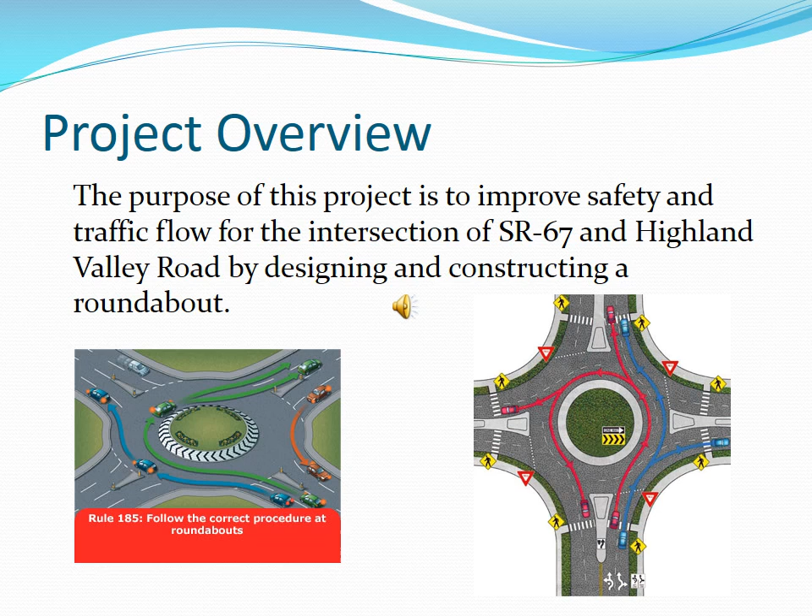The ASC Engineering team consists of, from left to right, Christopher Ramos, acting as the environmental engineer, Dwight Ashman, acting as the geotechnical engineer, Richard Moreno, acting as a traffic engineer, Joe Berhumi, acting as a transportation engineer, Jason Bell, hydraulics and hydrology, Sean Mosh, cost analysis.

The State Route 67 and Highland Valley Road intersection is located approximately 20 miles northeast of San Diego. This intersection serves as the main arterial passage which connects the unincorporated communities of Ramona and Julian to the greater San Diego area. Every day, over 2,500 vehicles arrive at this intersection during the peak traffic hour, creating traffic that extends for miles on each connecting corridor.

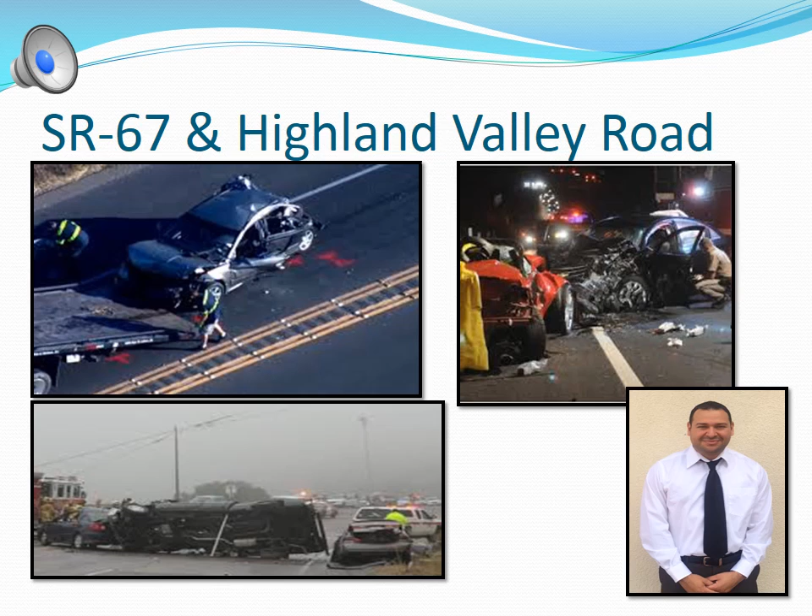The source of this delay stems from the intersection's inadequate number of lanes, the volume of traffic, and the traffic signal located at the intersection itself. During low traffic hours, speeding drivers often misjudge the stopping distance required for their vehicles to come to a complete stop. This mistake leads to catastrophic vehicular accidents.

These traffic delays have a significant impact on the environment by means of CO2 emissions, the driving mood of motorists by provoking aggressive driving, the economy of the city, and the everyday life of the Ramona community. In order to address these problems, ASC Engineering has developed and designed a roundabout intersection solution. This design will help to reduce the number and severity of accidents, reduce roadway delays, reduce CO2 emissions, and promote economic and community growth.

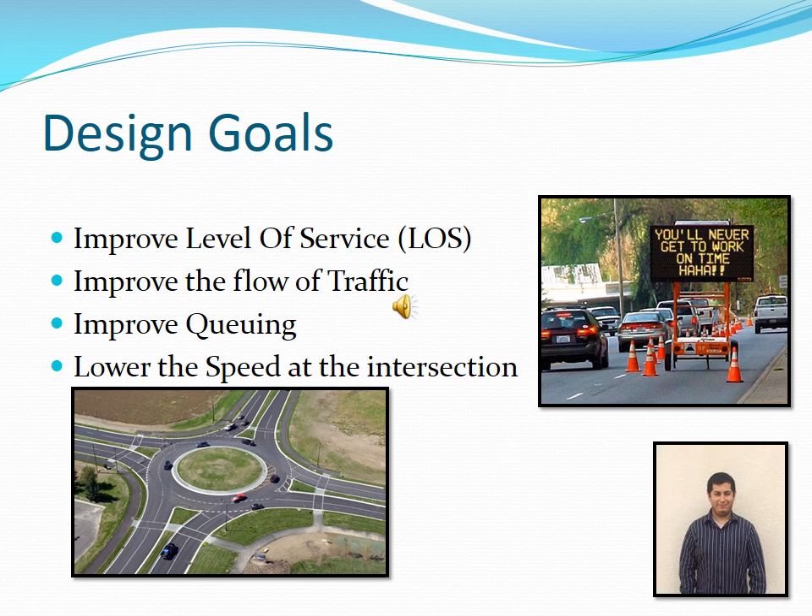Our design goals here at ASC Engineering for our roundabout are to ease the flow of traffic, as well as improve the level of service at the intersection of State Route 67 and Highland Valley Road. Our roundabout will improve the queuing, as well as lower the incoming speed at the intersection. We at ASC Engineering chose to adhere to the highway design and highway capacity standards. We based our design off of the NCHRP, National Cooperative Highway Research Program.

We designed a multi-lane roundabout that consisted of 2 lanes. These lanes are 16 feet wide so that a 67-foot truck can travel through the roundabout safely. The proposed roundabout will have a diameter of 160 feet. The roundabout is designed for a speed of 25 miles per hour.

This design will lower the current speed of the State Route 67 highway from 55 miles per hour to 25 miles per hour. We calculated that this design would be able to improve our level of service from a grade F to a grade D. We calculated that our design will be able to continue to provide a better flow of traffic for the next 20 years.

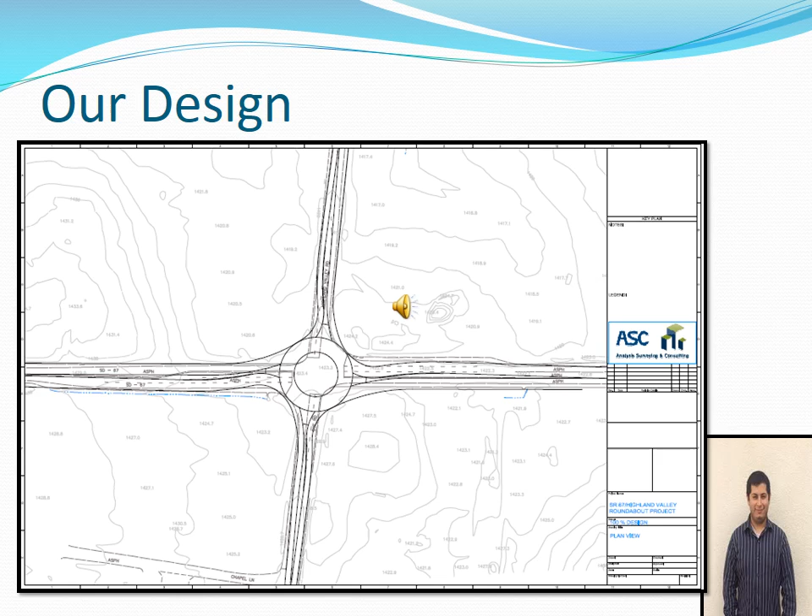Our approach at ASC Engineering will have a limited impact on the surrounding environment, as well as improve the flow of traffic at the intersection. We will also provide a safer speed and reduce the number of crashes at the intersection. We at ASC Engineering believe that our design meets all the criteria we set out to accomplish at the beginning of our proposal.

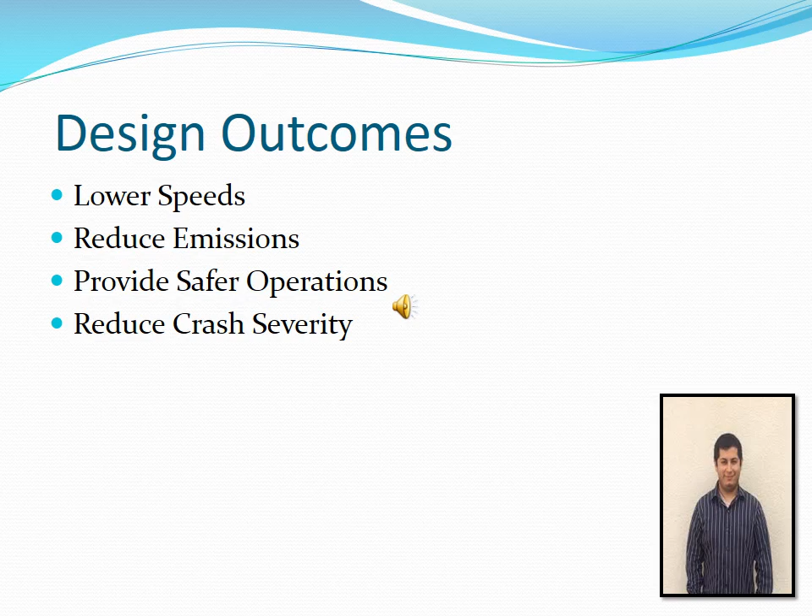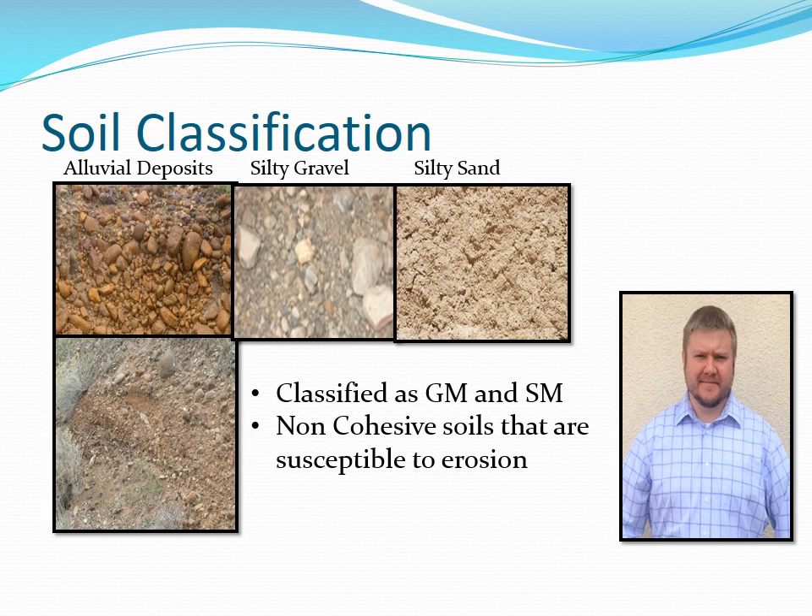The project site is primarily comprised of alluvial deposits containing well-rounded boulders, gravels, sands, and silts. The unified soil classification for these deposits is primarily silty gravel and silty sand. These are both non-cohesive soils and as such are highly susceptible to erosion, making stormwater management important for the success of this project.

The R value for this project was obtained from recent examination of the site, with an R value range of 20 to 45, which is typical of gravels and sands. An R value of 20 was taken as recommended from the California Highway Design Manual based on the lowest R value present.

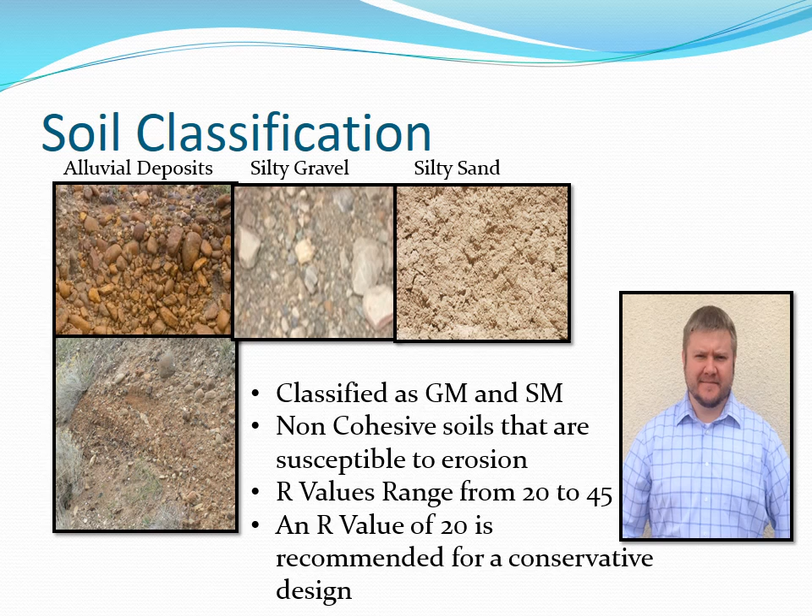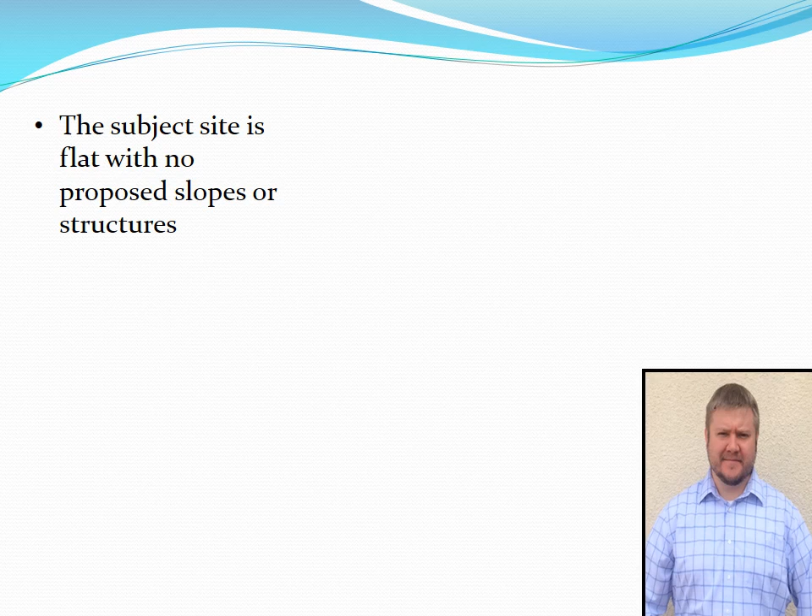The subject site is flat with no proposed slopes or structures, and minimal grading will be required. The soil at the site is adequate in both strength and expansion characteristics for the proposed roundabout. No conditions or structures were identified at the site that would cause any engineering challenges to the proposed project.

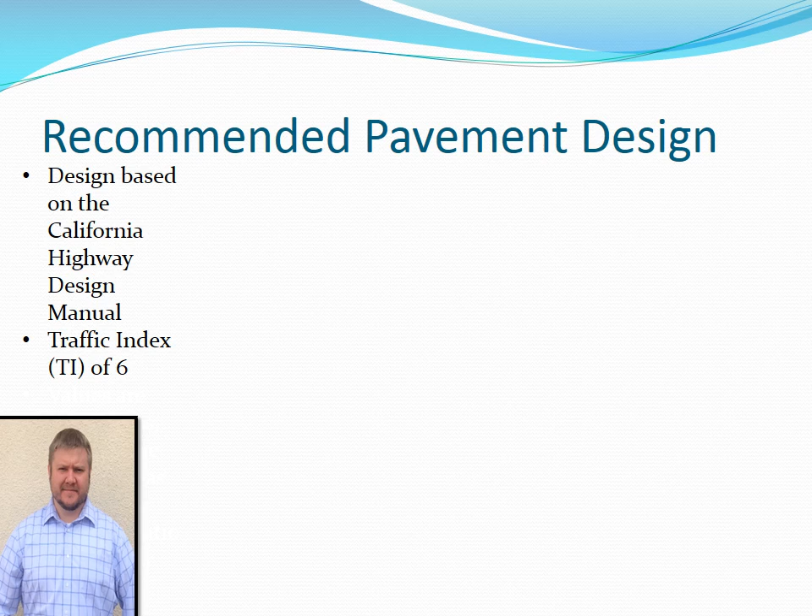Pavement design recommendations are based on the California Highway Design Manual, using a traffic index of 6 based on projected traffic characteristics. These values are minimums and may be increased as deemed necessary by the transportation engineer. The subgrade should consist of compacted native soil with the R value taken to be 20 for this project. Overlaying the subgrade is the number 2 subbase. This layer should be 4.5 inches thick with a compacted R value of 50.

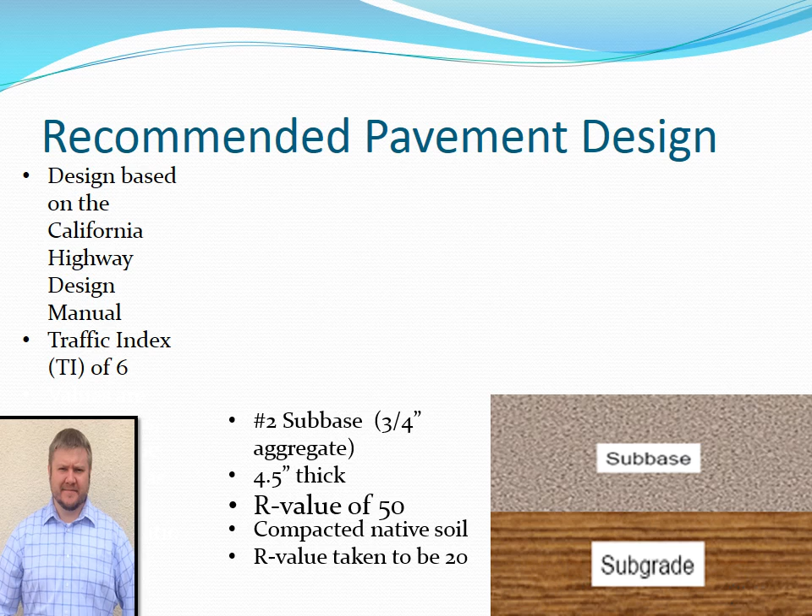The number 2 aggregate base should be a minimum thickness of 5.9 inches with a compacted R value of 78. The surface layer should consist of compacted asphalt concrete with a binder graded PG 64-10, and it should be at 3.2 inches minimum thickness. These values were obtained based on the manual method from the California Highway Design Manual and should be used or exceeded in all pavement design for this project.

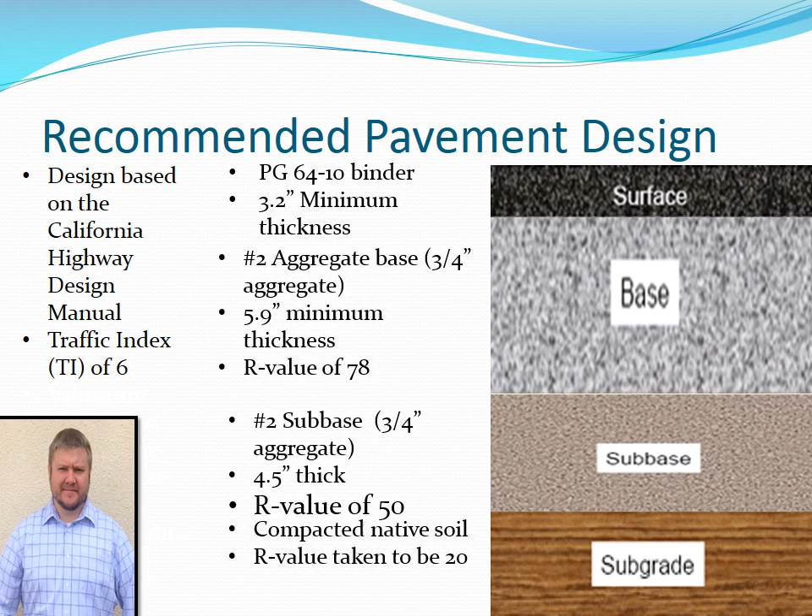For the hydrology, I broke up the areas into 4 quadrants: northeast, northwest, southeast, and southwest. The arrows indicate the rainfall flow pattern, as you can see on the site plan. The water naturally flows from the southwest quadrant to the northwest quadrant and then to the northeast quadrant. Also, the southeast quadrant flows to the northeast quadrant, where the water collectively drains off-site.

For the drainage analysis, I used the 100-year event to design the drainage system. 24-inch drainage pipes will be required to handle the peak runoff flow for this 100-year event. The circles on the site plan represent these drainage pipes.

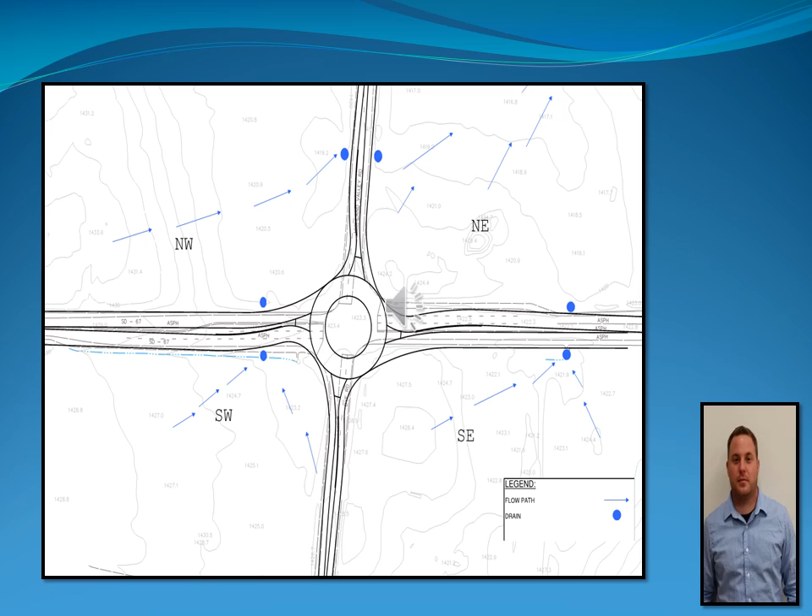According to the California Environmental Quality Act, which requires that local government agencies, prior to taking action on projects over which they have discretionary approval authority, consider the environmental consequences of such project. Some potential areas of concern that are associated with this project are air quality, greenhouse gases, noise, traffic, and water quality. Due to the current condition of the site, it is not suitable habitat for any species.

With mitigation, the overall impacts of these areas will be considered less than significant. Overall, the project itself will improve traffic efficiency and minimize vehicle wait times, therefore reducing most of the environmental impacts.

There are a lot of factors that influence the amount of economic investment justified for any type of project. The benefits of a roundabout are worth the investment. Some of these benefits may include reduced crash rates and severity of crashes. Also, roundabouts reduce delay, fuel consumption, and emissions. All these benefits weigh heavily in the decision to invest in a roundabout.

Higher costs are typically incurred when a substantial amount of realignment, grading, or drainage work is required. The cost of maintaining traffic during construction tends to be relatively high. This expense is due mainly to the measures required to maintain existing traffic flow through the intersection while rebuilding it in stages. Other factors contributing to high roundabout costs are large amounts of landscaping in the central and splitter islands, extensive signing and lighting, and the provision of curbs on all outside pavement edges.

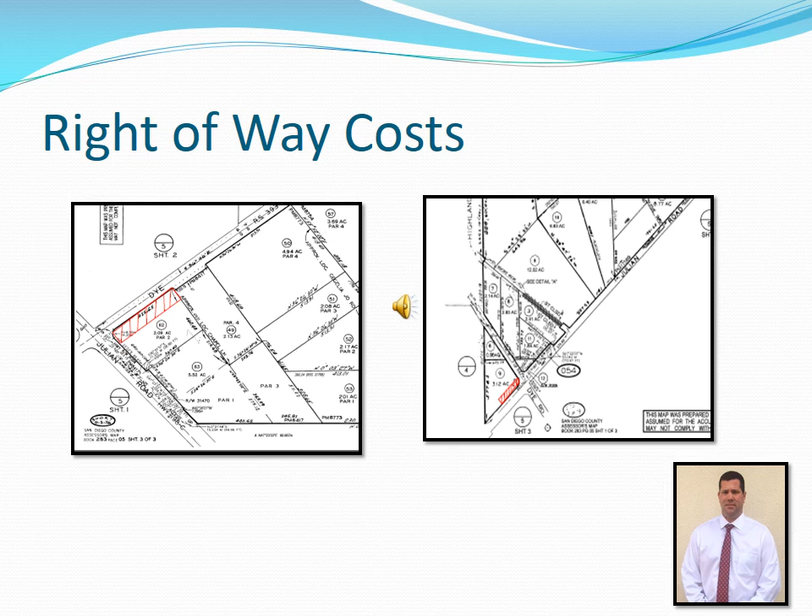Right-of-way costs are approximately $500,000. This includes the acquisition of a small percentage of 2 parcels located at the east and west corners of the existing intersection. We are expecting existing utilities such as SDG&E, Cox Cable, AT&T, and the Ramona Municipal Water District to be at a depth as to not interfere with the new roundabout.

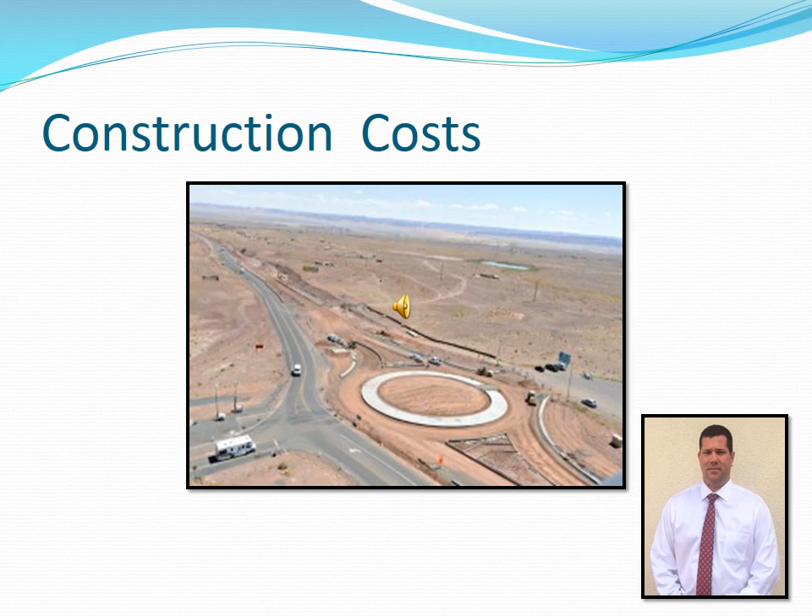The construction estimate for this roundabout is approximately $1.6 million. These costs have been calculated using the current design set forth in the design section of our submittal as a guideline. The total cost of this entire project is $2.1 million.